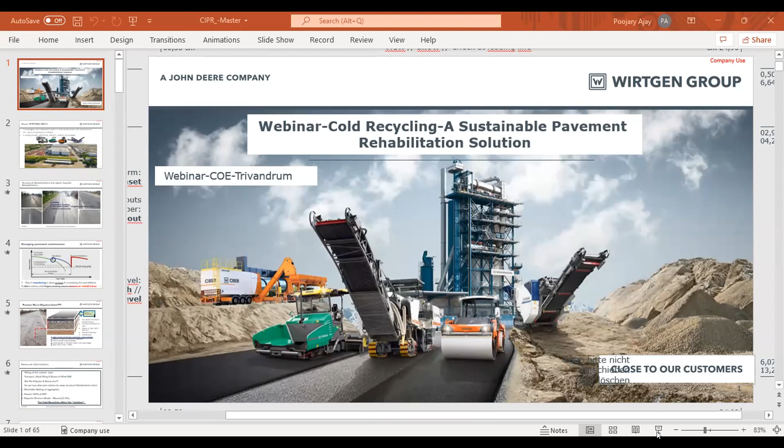Ajay, can you please switch on your video? It's off right now. Yeah. If possible. Is my presentation visible, ma'am? Yeah, presentation is visible. Yes. Yeah, so there's some issue with my video. Is it in full screen mode presentation? Yes. Yeah. Can I start? Yeah, sure. Video is off if you wish. No, actually I'm facing some difficulties. Okay, fine. Okay, we'll proceed. I'll check once again. No, ma'am. Okay, I'll start.

So once again, good evening, everyone. So today's topic is on recycled pavements using foam bitumen technologies.

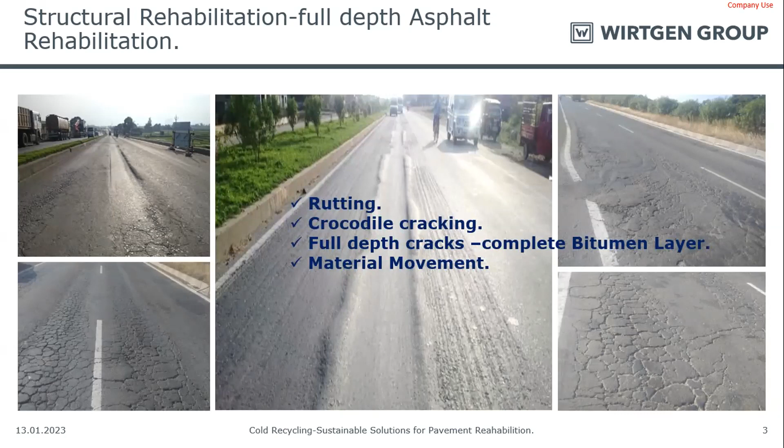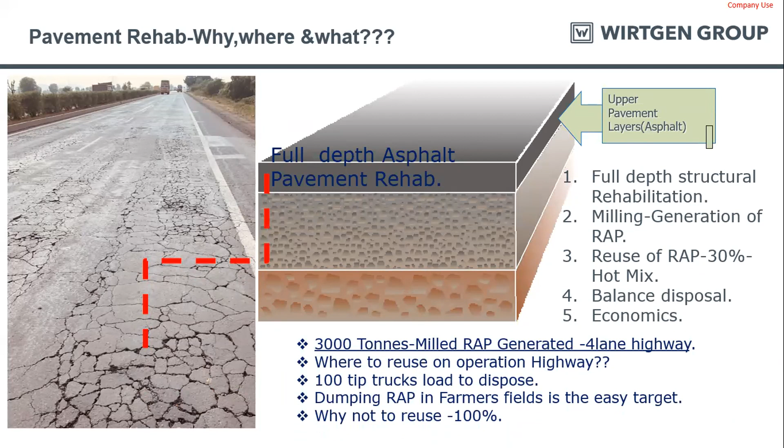So coming to pavement rehabilitation, depending on the pavement conditions, we go for full depth asphalt pavement rehabilitation for the upper layers of the asphalt layer. One option you have is mill the existing damaged asphalt layer using a milling machine, and then you can reuse 30% back into the hot mix. The code allows 30% reuse in the DBM layers, but the question arises what you will do with the remaining 70%. Whether you're gonna dump it or dispose it in the nearby areas, again it causes environmental problems. So the question arises, why can't we use 100% of RAP back into the system?

Coming to resource optimization, as I said, one option of pavement rehabilitation is mill and fill. Mill the existing asphalt layer, take it back to the hot mix plant, and use it 30% back into the system. But there is one more option where you can get 100% RAP back into the system. That is called CIPR, cold in place recycling. This ensures 100% reuse of RAP back into the system. We do it in situ. It eliminates any heating of the existing aggregates, and we require only 2.2% of bitumen as binder and 1% cement as filler.

So what is cold recycling? CIPR, as the name says, is a method of removing and reusing the existing asphalt surface. It involves grinding the existing top asphalt layer, mixing it with the pre-spread cement and bitumen as foam, and placing it back on the surface.

Here the existing pavement is not heated at all. Only the bitumen is heated, to a temperature of 170 to 180 degrees Celsius, depending on our job mix formula as well as the design criteria. Here foam bitumen or emulsion is used to bind the cold aggregates. In emulsion, as you know, water makes up to 30%, so 1.3 times the amount of emulsion is required to add the same amount of bitumen.

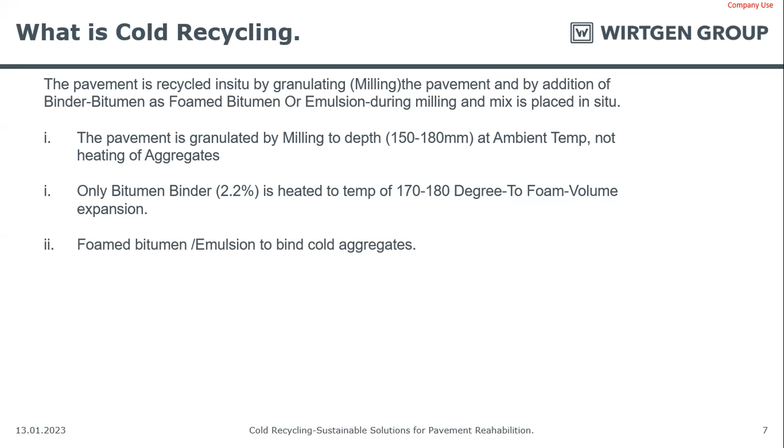If we go for emulsion, it just creates patches on the surface of the aggregates. Whereas in the case of foam bitumen, we add 2.2 to 2.4% of VG30 bitumen, so it covers the entire surface area of the aggregates. Hence we get more bond and better riding quality. The codes for recycling of pavements are IRC 37, 2012 and 2018, as well as IRC 120.

In in situ recycling, 100% RAP is used back into the system. We add 10 to 15% of fresh aggregate as per the missing gradation, and 1% cement as filler. When we check the modulus in the lab, we get close to 1400 MPa, but the code specifies a modulus of 800 MPa for recycled mixes.

CIPR is executed mostly in situ, so we can roughly do about 1 lane kilometer per day. Hence we get reduced logistics, resulting in economical and greener pavements. Next is a short video where you can observe the CIR process.

This is the foam bitumen concept. On the left hand side, you can see the nozzle for the hot bitumen. The bitumen is heated to a temperature of 170 to 180 degrees Celsius, and we generally use VG30 grade. This is the water line. When hot bitumen comes in contact with water as well as compressed air, it expands 18 to 20 times its original volume, which creates foaming of the bitumen.

This foam bitumen covers the entire surface area of the aggregate. All this process happens inside the mixing chamber of the machine. On the right hand side, you can see the mixing chamber, inside the machine. We have the water line as well as the bitumen line attached to the machine.

This drum granulates the existing asphalt layer and mixes it with the pre-spread cement along with the foam bitumen. So we get a BSM layer, called bitumen stabilized material. All this process happens inside the machine itself.

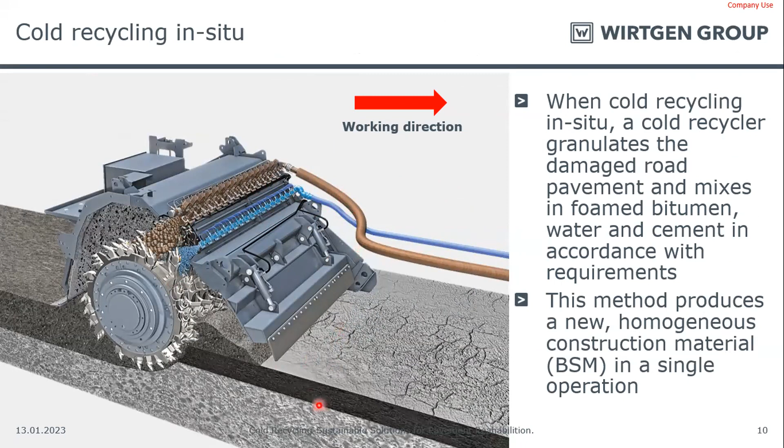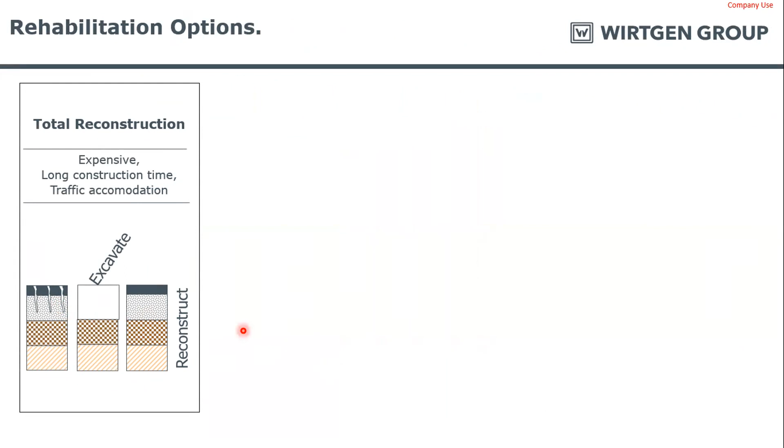Coming to rehabilitation options, we have different kinds of solutions. On the left hand side, you can see the complete top asphalt layer is damaged. One option is total reconstruction, but as you know it's expensive, leads to long construction time, and traffic will be a huge issue. The second option is a thick overlay, but it's not a permanent solution, just a temporary relief layer. The cracks will propagate into the top layer in due time.

The third option is mill and fill. We eliminate the existing cracks by milling with a milling machine, and then we can reuse the RAP back into the DBM layer. Here the code allows 30% of RAP in DBM. The last option is CIPR. Depending upon the project economics and how much quantum of work you have, you can choose either mill and fill or CIPR. Here you can get 100% of the RAP back into the system, with faster construction of 1 lane kilometer per day. After the BSM layer, we lay a BC layer on top of it.

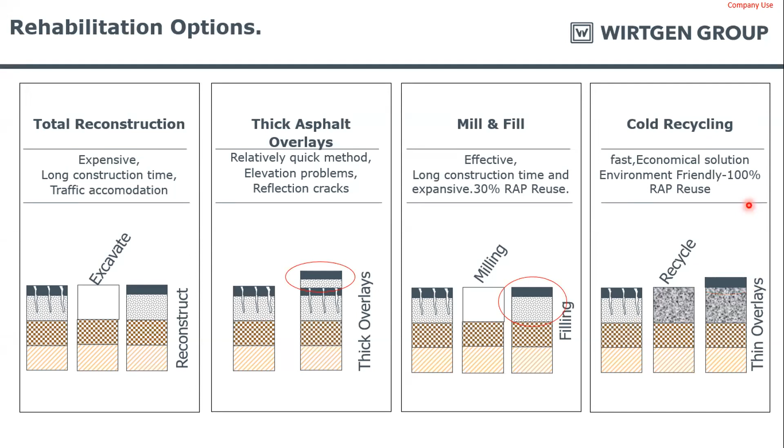This is the first recycling project done in India, on NH5, Chennai-Tada, connecting Chennai to Nellore. The project was executed under the guidance of Professor A. Veera Raghavan from IIT Madras, and the project was executed by L&T.

Here we recycled the asphalt layer up to a depth of 190 to 200 mm in situ. We required 2.2% bitumen as binder, and we added 15% crusher dust and 1% cement as filler. The final layer was laid with a 50 mm BC layer, and this was designed for traffic of 87 MSA.

As I said, you have two options, and you can decide based on project economics. Option one is mill and fill: mill the existing damaged asphalt layer and use 30% back in DBM. The second is the BSM layer, where you completely reuse the damaged asphalt layer back into the system, and seal it with a 50 mm BC layer.

Each of these two options, mill and fill or CIPR, have the same structural capacity. So the first option is mill and fill, and the second option is CIPR.

This was a mix design that we did at IIT Madras under the guidance of Professor A. Veera Raghavan. Here the samples were collected, we checked the gradation, and we put it inside a pavement.

The minimum criteria as per the codes is we need to get a half-life greater than 6 seconds and an expansion ratio greater than 8 times. This should be satisfied as per the TG2 guidelines 2009.

Then we cast molds and check for ITS, indirect tensile strength. This is done to check the susceptibility of the binder coating to moisture damage. As per IRC 37, the minimum criteria for ITS values are: we should get an ITS dry value of 225 kilopascal and ITS wet of 100 kilopascal.

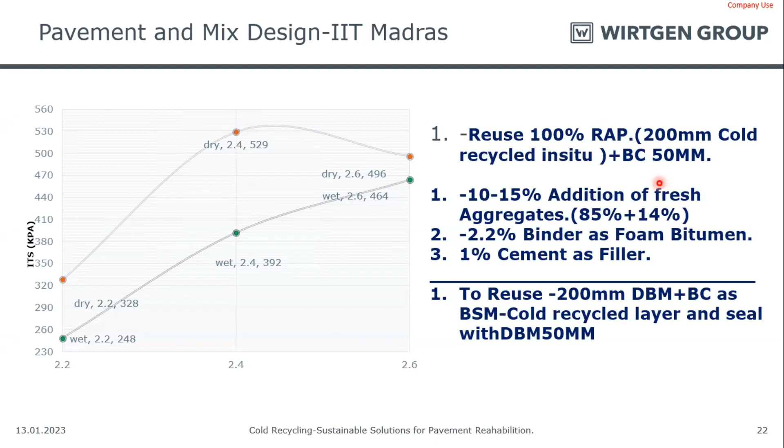It's a microprocessor controlled system where, depending upon the depth as well as density, this spreads the cement. It is an automatic controlled machine.

Next is the Wirtgen recycler. It granulates the existing asphalt layer along with the addition of bitumen and water. The bitumen and water tanker will be coupled in front of the machine, which pushes the water and bitumen tanker. The bitumen will be preheated and stored in the truck at a temperature of 160 to 180 degrees Celsius as per the design.

After this process, we use the roller, a 20-ton roller to get better compaction results. Then we grade it to get the profile, and then we have the single drum roller and the pneumatic tire roller to follow. So this is the procedure of how we execute it in situ.

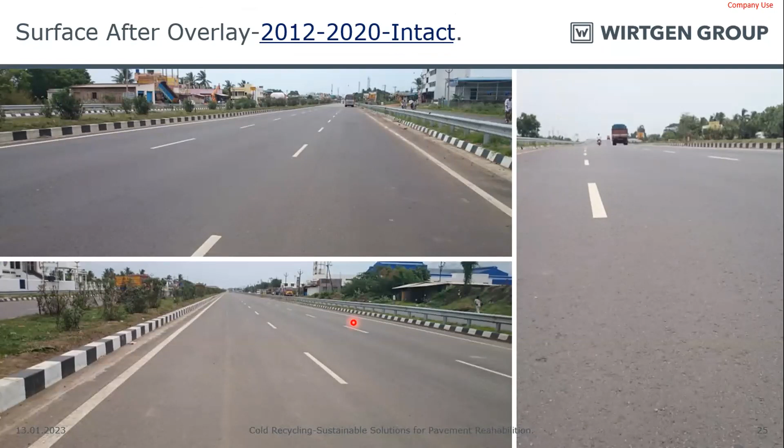Coming to cost economics, as I said, depending on project conditions, we can choose either mill and fill or CIPR. By using the mill and replace option, we could get a rough cost of 314 lakhs per kilometer. But if you go with the CIR process, we got a cost analysis of 204 lakhs per kilometer. So there was a huge amount of initial cost savings, roughly 35% cost savings by using CIPR technology.

Coming to fresh aggregate requirement, if we had gone with mill and fill, we would have required roughly 8,000 tons per kilometer of aggregates, but by CIPR we required roughly 3,000 tons per kilometer. So roughly 65% savings in terms of fresh aggregate requirement. In terms of fresh bitumen requirement, we could save roughly 25% in this project.

So this was the existing condition of the road. Again, you have two options, either to go for mill and fill or BSM. Here we recycled the top 150 mm damaged asphalt layer and we sealed it off with a 50 mm BC layer on top.

This project involved addition of 15% fresh aggregates into the system, and we had cement at 1% as filler, and bitumen requirement was 2.2%. So the complete damaged layer was recycled in situ, and then we sealed it with a BC layer on top. As I said, it's a quick process.

We could complete 1 lane kilometer per day. Coming to construction costs, roughly it will be, including the machinery, around 5,000 rupees per cubic meter.

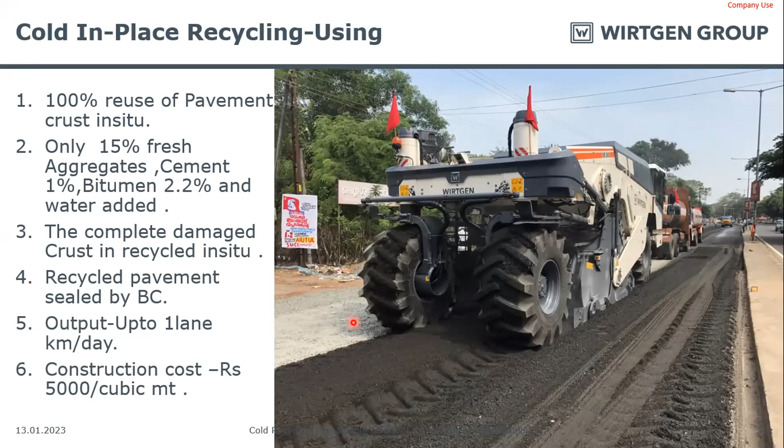Some pictures of site execution. You can see on the right hand side we have the traffic going, left hand side we are executing the project. This is the pre-spread of aggregates.

Second, you can see we are spreading the cement as per the design. Then this machine comes, which we used to recycle the existing pavement with the addition of cement as well as bitumen. Short video.

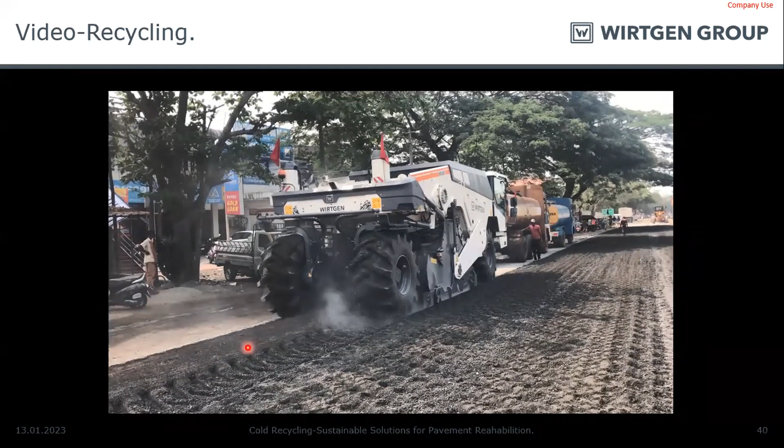So this machine will be in the coming project in Trivandrum, running for one more technology called FDR, full depth reclamation. We'll be starting this next week. So if you have to visit any job site, I think you can plan for this stretch.

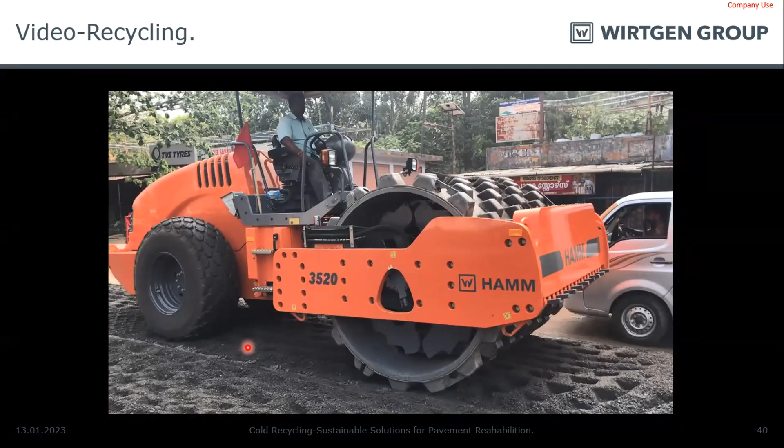This is a recycled surface after this CIR process. As I said, we pre-spread the cement, then we recycle it with the machine, and then heavy duty compaction, and then we grade it to the profile, followed by the compaction process.

In this project, we could come down on 26% savings in terms of aggregates and also in terms of cost. This is one more project, NH62, Beawar Pali Pindwara. This was executed by L&T.

This is some of the field investigations which were done. We dug up test pit observations. A total of 6 pits were dug, measuring 1.2 meters in size, dug up to the subgrade level at 6 different locations of this job site.

Next, coring of bituminous mix was done to evaluate the depth of the crack up to which this asphalt layer is damaged. Then we collected this milled material for evaluation of RAP mix design in the laboratory. Various laboratory tests were done, and then the project was executed.

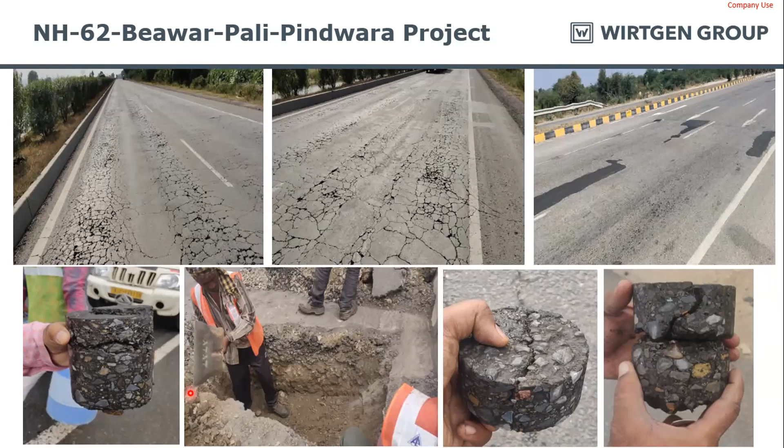There are two options. Here we recycled 130 mm in situ with the addition of 10% fresh aggregates, and we then sealed it with 50 mm BC.

These are some of the IITPAVE values for fatigue and strain criteria. These are the job site pictures. Here you can see the bitumen tanker and a water tanker, which is coupled to the machine.

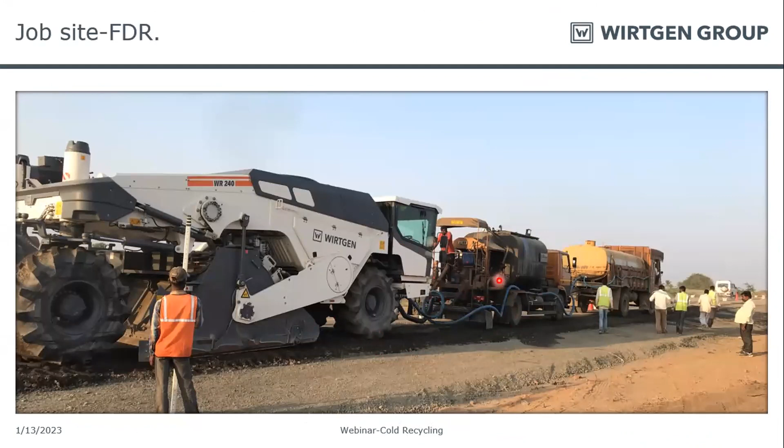These are the execution process. As you can observe from the pictures, first we pre-spread the aggregates as per the mix gradation. Then we spread the cement using the microprocessor controlled cement spreader. Then we pulverize the existing damaged asphalt layer with the addition of bitumen as foam and water as per the mix design. Then we grade it and compact as per the design, and on top we cover it with the asphalt layer.

These are some job site procedures. The existing asphalt layer, we spread aggregates as per the mix gradation, and we grade it with a grader.

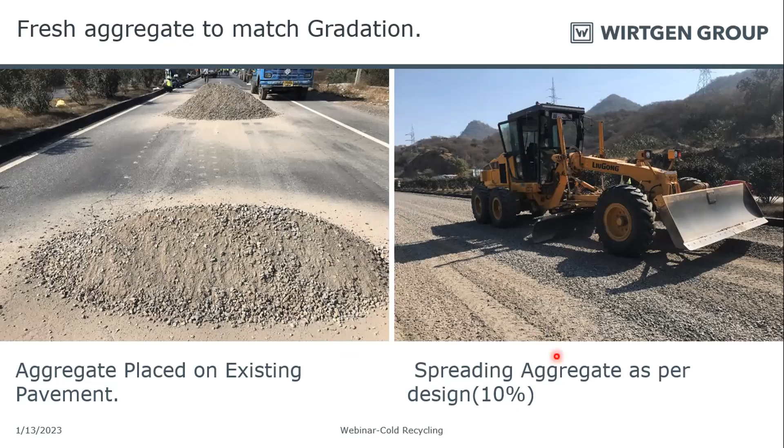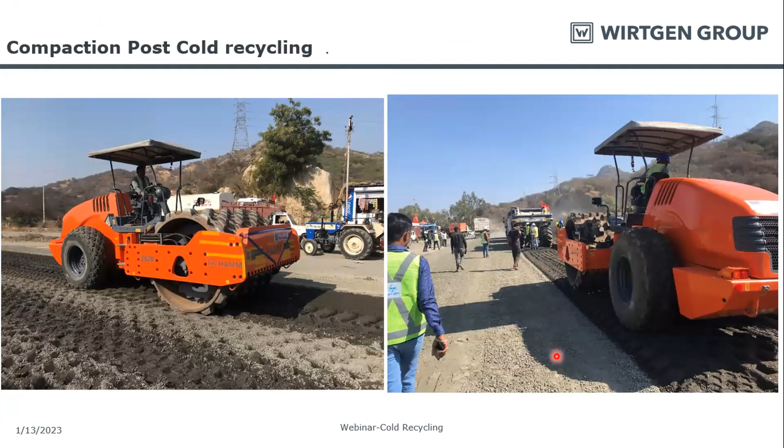The next step is we do a heavy duty compaction, then grading to the profile, and we get a recycled surface. Then we lay a tack coat and a BC on top of the BSM. We need to cure the BSM layer for 48 to 72 hours before laying the BC layer.

These are some of the job site pictures. There's one more site in NH2 Varanasi. Here we recycled roughly around 130 mm of the existing asphalt layer.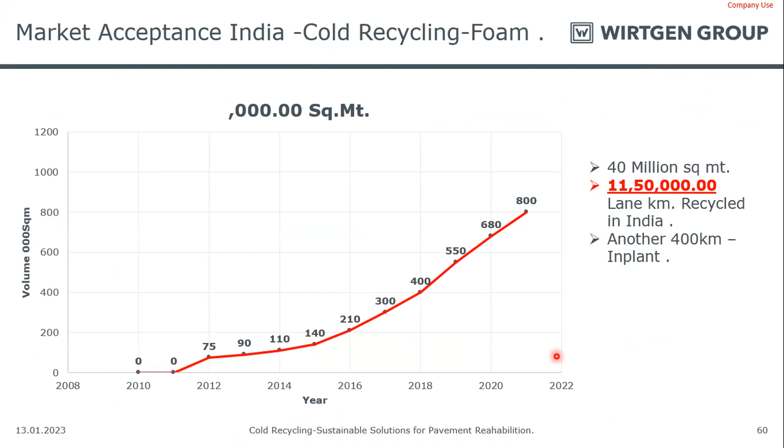Coming to market acceptance in India, we have roughly done around 40 million square meters using these technologies, and another 400 kilometers we have executed in the plant way. These are the summaries from the various projects, where we could save on aggregates, save on bitumen, as well as emissions.

So we check the bitumen temperature, and also we check the expansion ratio and half-life. We check the bitumen which is being injected to the machine, and also we check the density in the field. After the existing layer is relaid, we take samples for evaluation in the lab.

Coming to the cold recycling summary, as I said, it depends on project to project. The average working depth in India is roughly 100 to 180 mm. We recycle DBM and BC together, so 100% of your RAP is reused in the system in-situ. We only require an addition of 2.2% bitumen as binder, VG30, and 10 to 15% fresh aggregate as per the design. There is no heating of fresh aggregates.

The approximate cost for this, including the machinery, is 5,000 rupees per cubic meter. It's faster construction, you get savings in emission, and roughly you can complete 1 lane kilometer per day.

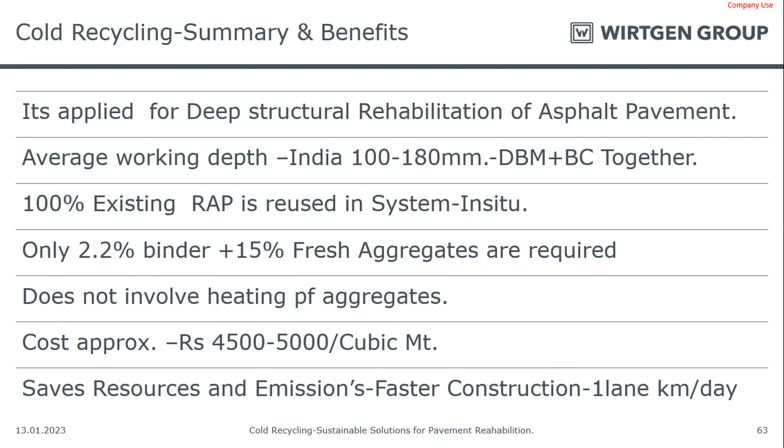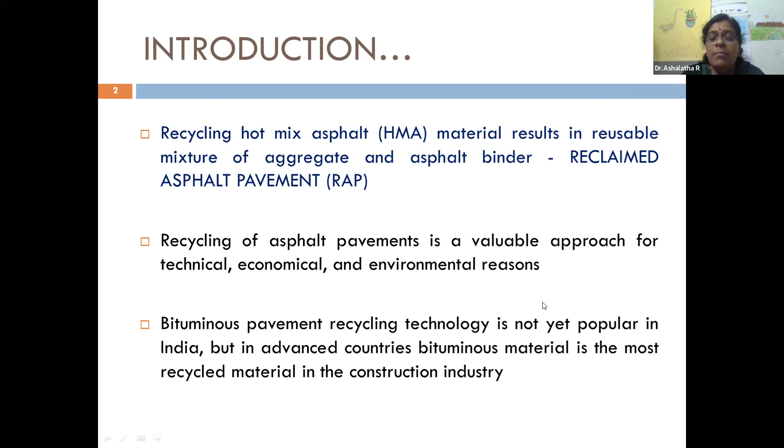And of course, it is getting more prominence with the contribution of the experts in this field and with the industry. It has become more important, but in outside countries it has already been extensively used. And we know of the various ecological and economic advantages which contribute to the enhancement of the recycling process: to conserve the aggregates and binder, to reduce the cost of transportation, to preserve the existing pavement geometries, conservation of energy and labor, and decrease in the pavement thickness or height.

Okay, so we know that RAP is actually deteriorated bituminous mix, which contains aged bitumen and aggregate, and its performance as such is poorer when compared to that of the fresh mix. But we have to use it. How to make it better or almost equal to a fresh mix and use it? So bituminous recycling is to regain the properties of the RAP such that it tends to perform as good as fresh mix.

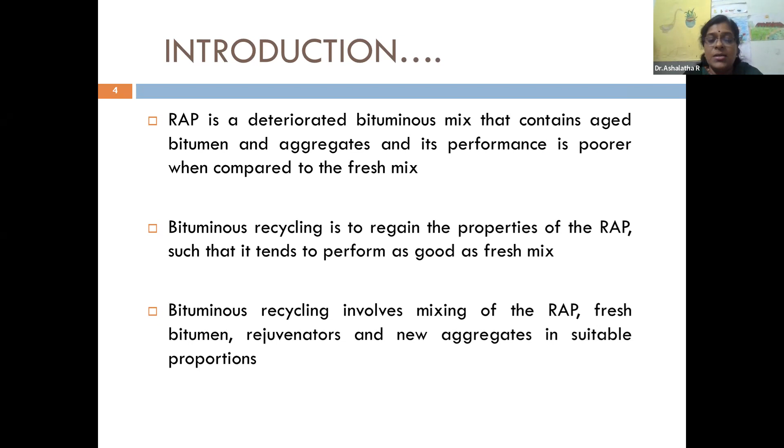Okay, so it involves mixing of the RAP, fresh bitumen, rejuvenators, and new aggregates in suitable proportion. So what is that proportion? That is what we were exploring in our first work. And later on, we tried to use warm mix asphalt additives, because it is known that warm mix asphalt additives reduce the temperature of production of mix and stiffness of the aged binder. And warm mix asphalt technologies in practice, like WMA foam, Asphamin, Sasobit, Evotherm.

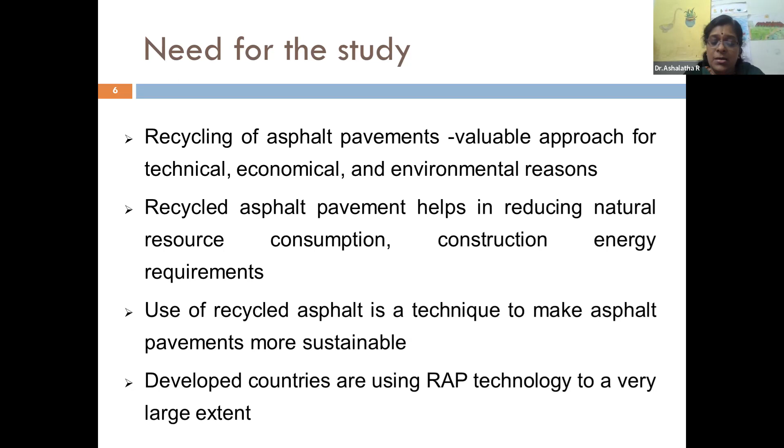Okay, coming to the need for the study at that time, as I said earlier, way back in 2013, we understood the importance of the country switching over to recycled asphalt pavement, and it is something which will happen in the near future. And this use of recycled asphalt is a technique which, as I said, comes under sustainable engineering, and developed countries have already moved well ahead in this particular area, and we are only in the initial stage.

Of course, now we have improved a lot, and the RAP consists of this aged binder with high viscosity. When we add the WMA additives like Sasobit, we use Sasobit, it generally reduces the viscosity of the asphalt binder.

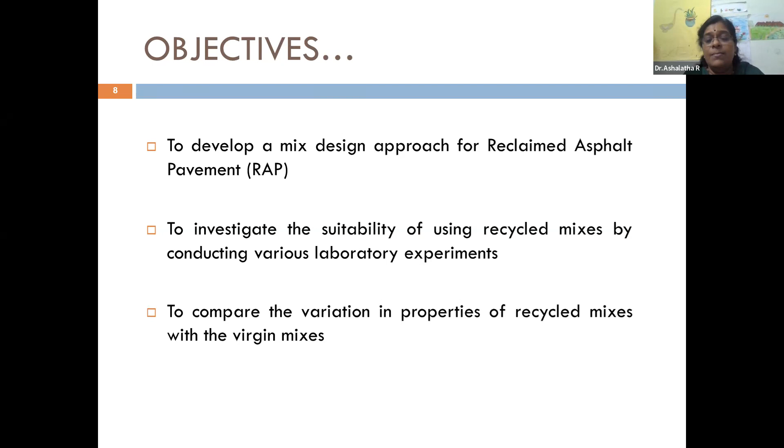And coming to the objectives: to develop a mix design procedure for reclaimed asphalt pavement, to investigate the suitability of using reclaimed asphalt mixes by conducting various laboratory experiments, to compare the properties of the recycled mixes with the virgin mixes, to develop a methodology for design of bituminous concrete mix using RAP with Sasobit as additive, to conduct various performance tests to evaluate the permanent deformation, moisture susceptibility, and stiffness of the bituminous concrete mix with RAP and Sasobit, and to compare the performance of bituminous concrete mix with RAP and RAP with Sasobit with the original bituminous concrete mix.

And this was the methodology. So I already said it has two parts. In the first set, we were developing what procedure is to be adopted. So for that, we collected RAP from two locations in Trivandrum city, and we characterized the RAP: binder content determination using a centrifugal bitumen extractor, extraction of the aged bitumen using a rotary evaporator, and sieve analysis of the extracted aggregate. And also we determined the properties of the aged bitumen, aged aggregates, and the fresh aggregates, because we need some fresh aggregates too, as well as the virgin bitumen.

So all those properties were tested, and the Marshall mix design approach to prepare control specimens was adopted, with bituminous concrete mix with nominal aggregate size of 19 mm, that's grade 1, and average pavement thickness of 50 mm. And we determined the binder content. Based on that, we first found out the optimum bitumen content, we prepared the specimens, and then we conducted the various tests on them.

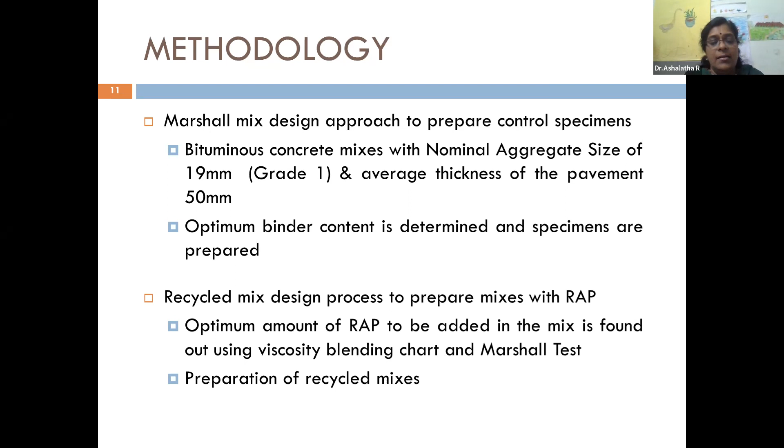And the recycled mix design process to prepare the mix with RAP. In that case, we found out what is the optimum amount of RAP we have to add in the mix. This was found, as per the literature at that time, using the viscosity blending chart, and the recycled mixes were prepared. And we also determined and compared the performance of these mixes. We conducted creep tests, dynamic modulus tests, indirect tensile stiffness modulus tests, indirect tensile strength tests, etc.

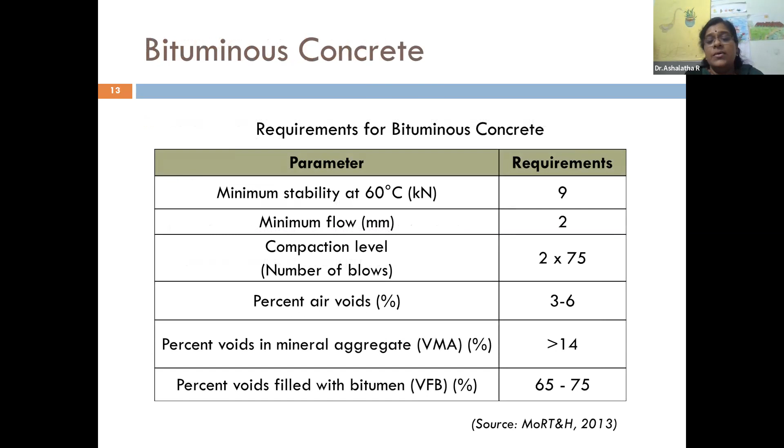And of course, since it's an old work, these are the specifications at that time, and the standard gradation for bituminous mix. And we used VG10 and VG30. Actually, VG10 was used as a recycling agent, and coarse aggregate, fine aggregate, and mineral filler. And as I said, RAP was collected from two locations. One was 3 years old, and the other 5 years. The RAP collected from sample one was a bituminous concrete mix, and the other was a premix carpet type.

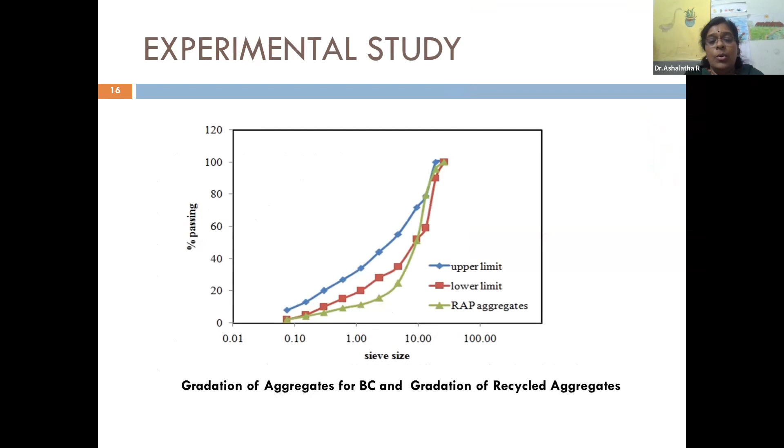And this is the gradation of the aggregate for bituminous concrete and gradation of the recycled aggregate, the upper limit, lower limit, and what we got for the RAP aggregate. Okay. We used the rotary evaporator because we needed to understand the characteristics of the bitumen. So we wanted to extract the bitumen from the RAP, and the bitumen was recovered from the solvent using this rotary evaporator. That ensures that there's minimum change in the bitumen property. And the bitumen recovered by this practice can be tested using the same method as the original bitumen, and the properties can be compared.

This slide is not moving. Okay.

Okay. So this is the rotary evaporator. I think already the photographs have been shown by the other speakers. And for this, my students and I went to IIT Madras and sought their help, because our institute was not having such a setup.

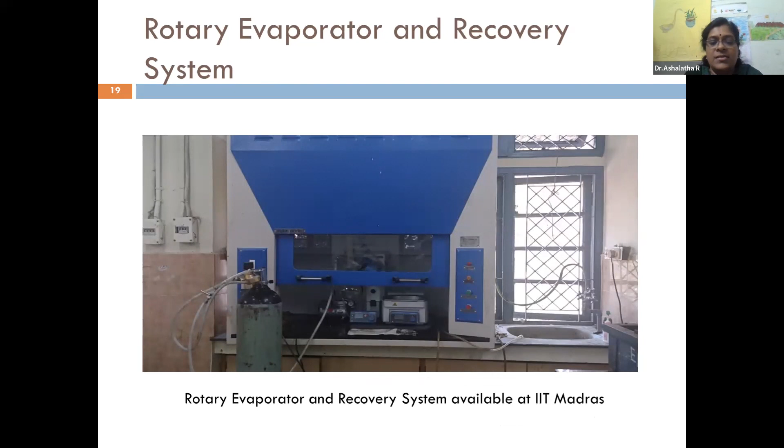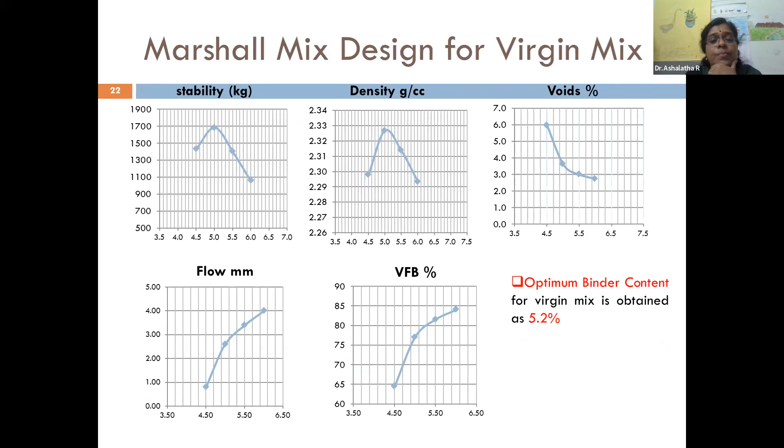And also we conducted the Marshall mix design for the virgin mix, and the optimum bitumen content for the virgin mix is obtained at 5.2%. And coming to the recycled mix design. So the basic requirement of the mix design is that the quantity of the old aggregate and new aggregate has to be adjusted in such a way that the resulting gradation of aggregates conforms to our specification, or the specified gradation.

And the quantity of the aged bitumen, the virgin bitumen, and the rejuvenator, in this case VG10 was used as a rejuvenator, we have to adjust in such a way that the resultant viscosity becomes equal to the desirable viscosity at the operating temperature. And the total quantity of the binder should be adjusted in such a way that it satisfies the desired binder quantity of the target mix. And then the other volumetric and strength parameters of the mix should also be satisfied.

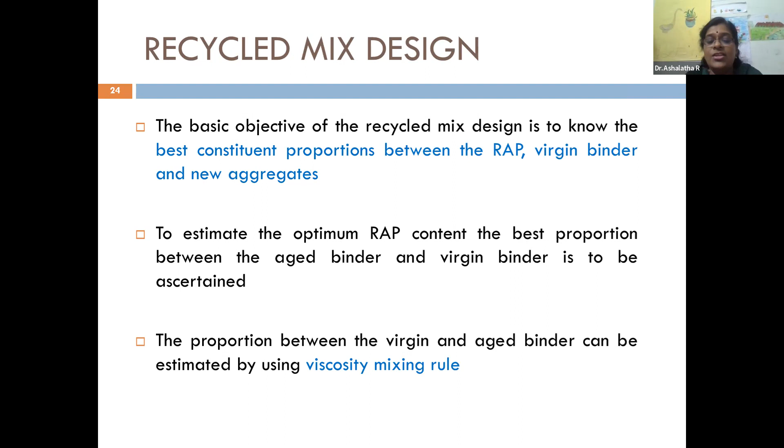So the basic objective is to know the best proportion of the RAP, the virgin binder, and the new aggregate, and to estimate the optimum RAP content. The best proportion between the aged and the virgin binder has to be ascertained first, and it can be estimated by using the viscosity mixing rule. And the percentage of the recycling agent that's required to meet a target viscosity is determined.

That is just to start with, and then we do a few trials. A trial blend, which consists of the recycling agent and the reclaimed RAP binder, is prepared, and the viscosity of this trial blend at 135 degrees centigrade is then compared with the target viscosity. If the blend viscosity is not within the limit, it's a trial and error process. We keep changing until we get the target viscosity.

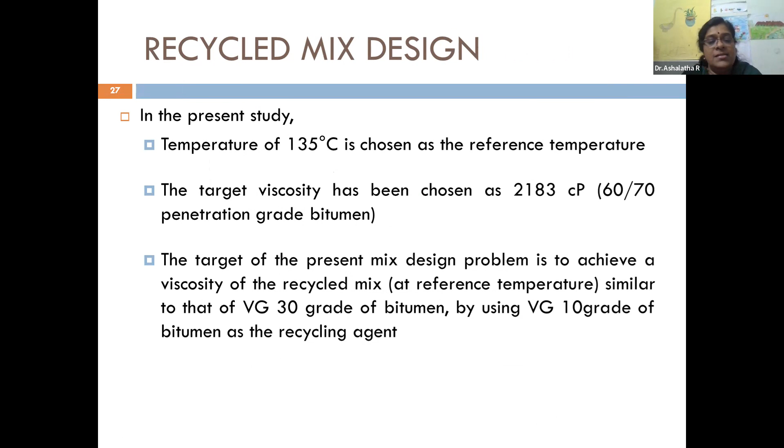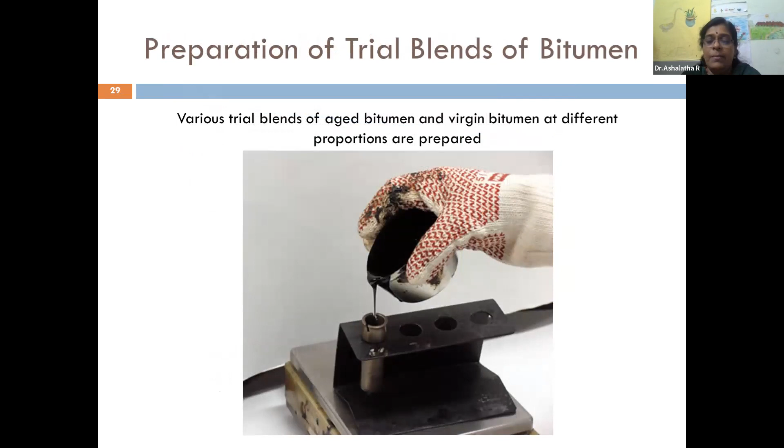The slide is not moving.

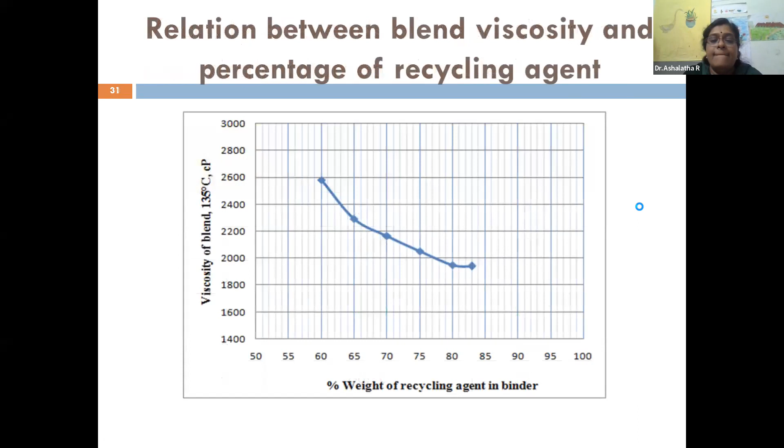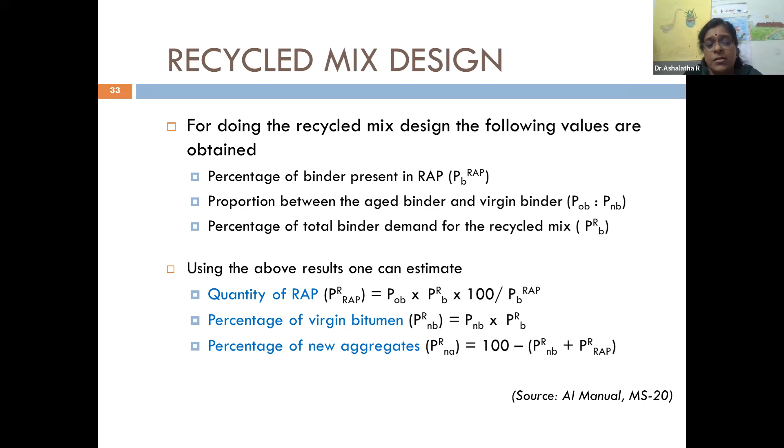So then, for doing the recycled mix design, we have to find out the percentage of the binder present in the RAP, the proportion we already obtained, and also the percent total binder demand for the recycled mix. So we use this expression, which is given in the Asphalt Institute Manual MS-20, to find out the quantity of the RAP, percentage of virgin binder, and the percentage of the new aggregate. And so those calculations were done.

And then Marshall parameters were determined for the recycled mix for different bitumen contents, and optimum bitumen content was obtained as 5% for the recycled mix, and the corresponding quantity of the RAP was 48%. You can see throughout our presentation, RAP content we are getting on the higher side, especially when you use Sasobit. And then the same thing was again repeated on the other sample. The same process was repeated.

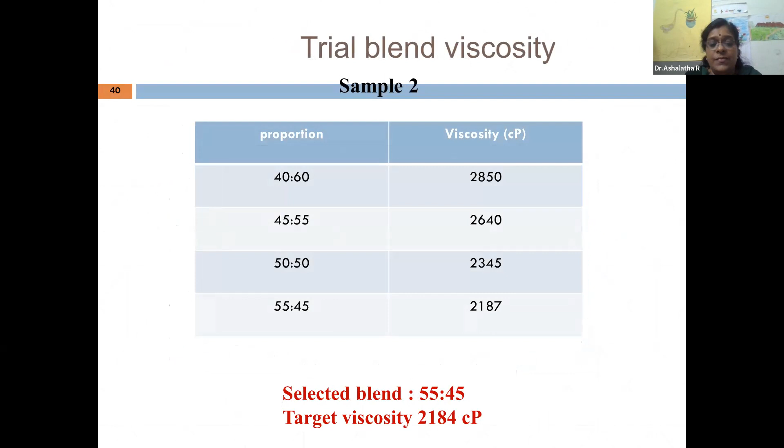So we found out the ratio of the recycling agent and the aged binder for the second case, and we found out which is the best proportion for this, which is nearer to the target viscosity. And then, for different binder contents and keeping that proportion constant, we found out the percentage of virgin bitumen, percentage of the RAP, and the percentage of the new aggregate in the recycled mix.

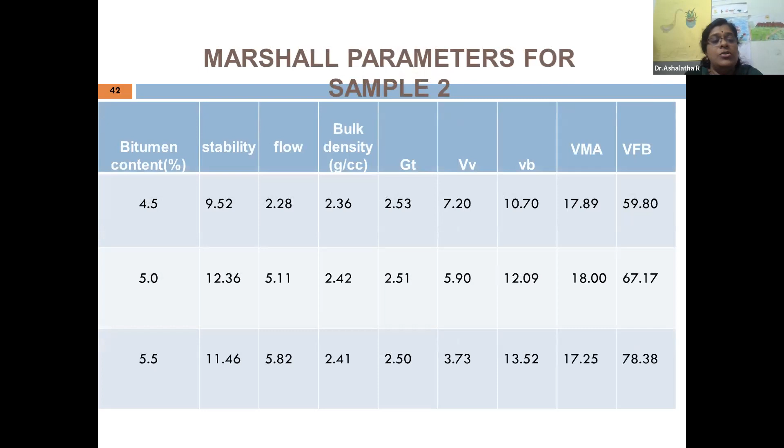And Marshall specimen parameters were determined for sample 2 for three bitumen contents, and optimum bitumen content was determined as 5.2%, and the percentage of RAP was 47.75%, and the percentage contribution of binder from the RAP was 45%.

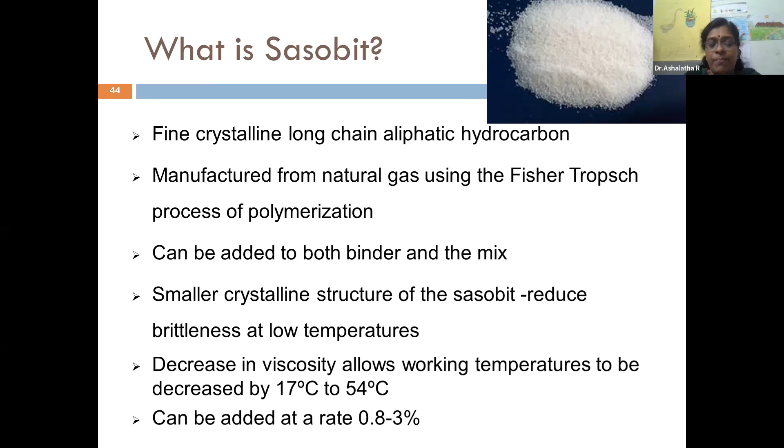And the advantages of using Sasobit are it improves the compactability of the mixture, and it decreases the rutting potential of asphalt mixes. That's what literature says. But it does not increase the moisture damage as other WMA technologies do.

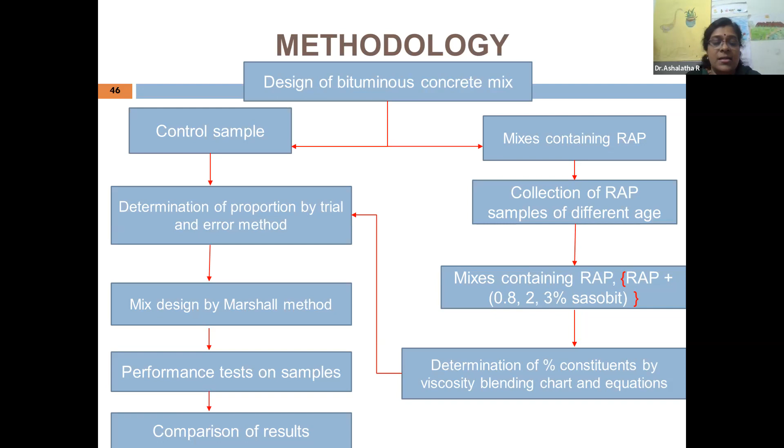So this was the methodology which we used, similar to the one we had discussed for the design of the RAP mix. But here, we have two samples, material collected from two locations. For each location, we conducted the test with 0.8, 2, and 3% Sasobit, and then we determined which is the best one, and then performance tests were conducted on that, and the results were compared, and also compared with the virgin mix.

Okay, so this is the design of the recycled asphalt mix containing Sasobit for sample 1. As I said earlier, aged bitumen with 0.8%, 2% and 3% Sasobit was done, and VG10 was used as a recycling agent. And these were the viscosities which we obtained. Similar to the earlier case, we found out the ratio of the recycling agent and aged binder, and that was done for sample 1 for 3% Sasobit, and this is the combination of those results.

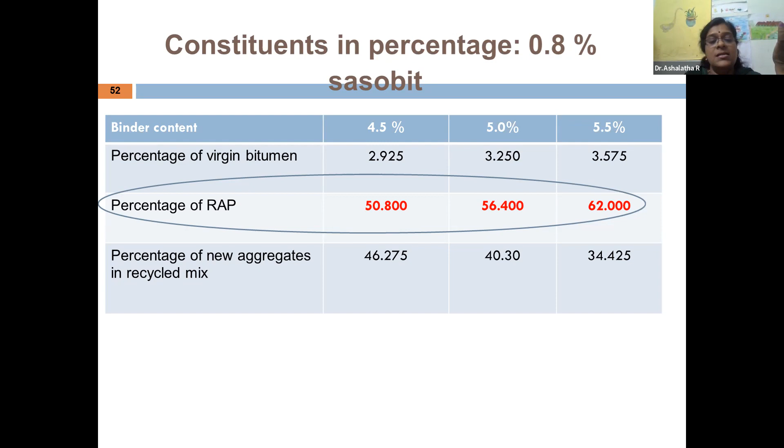And then what is the constituent in percentage? With 0.8% Sasobit, we varied the bitumen content for 4.5, 5, and 5.5, keeping the ratio constant. Based on those equations which I showed earlier, we could find out the percentage of the virgin bitumen, the percentage of the RAP, and the percentage of the new aggregates in the recycled mix. Okay, and the same exercise was repeated for 2% Sasobit.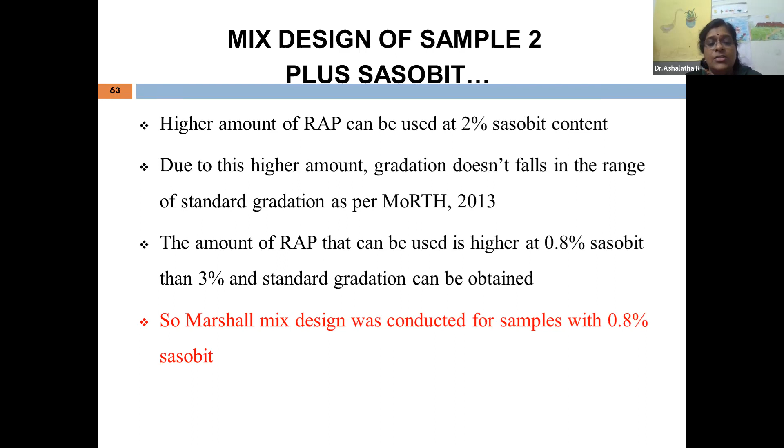And we could find that for sample 2, a higher amount of RAP can be used at 2% Sasobit content, but the gradation was not satisfying the MoRTH specification because it was falling out of the range. So then we compared between 0.8 and 3%, and we found that the amount of RAP that can be used is higher for 0.8% Sasobit. So we decided to go with 0.8% Sasobit for sample 2.

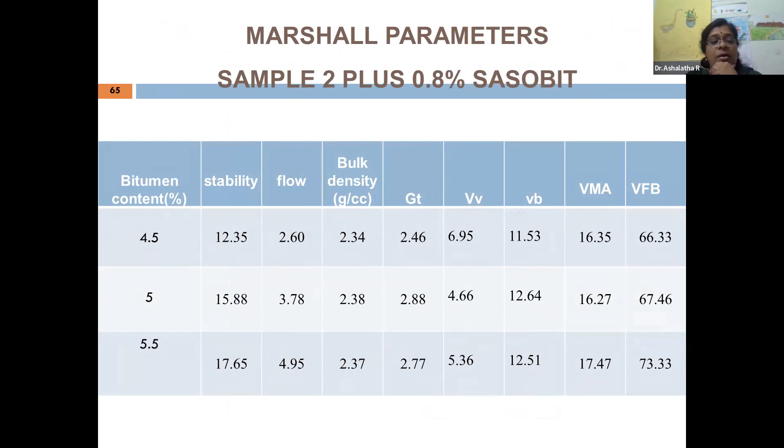So this is what I said, the trial and error process with 2%. Since it was not satisfying the required gradation, we went with 0.8% Sasobit, and these are the Marshall values. And then we found the optimum bitumen content comes to around 5.1%, percentage of the RAP as 65.57%, and the percentage contribution of binder from the RAP is 63%.

And these are for the optimum bitumen content with 0.8% Sasobit; as I said earlier, it was coming as 5.1%. And those parameters were compared with MoRTH, and we could see that here also not all are satisfied; the flow value is slightly outside the range, others are fine.

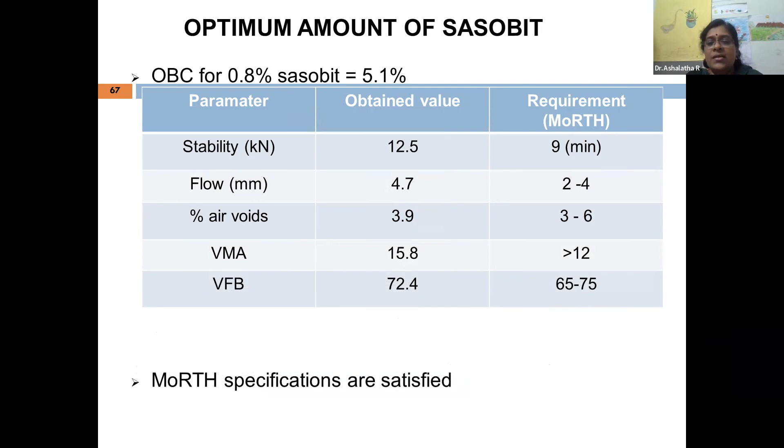And then, on the samples which we have finally, sample 1 with 2% Sasobit and sample 2 with 0.8% Sasobit, we conducted various performance tests: indirect tensile strength ratio test, static creep test, dynamic modulus test, indirect tensile stiffness modulus, rut depth determination, etc. In the first 2 cases, Marshall specimens were cast, and for the others, Superpave gyratory compacted samples were prepared. And this is the test setup which we used.

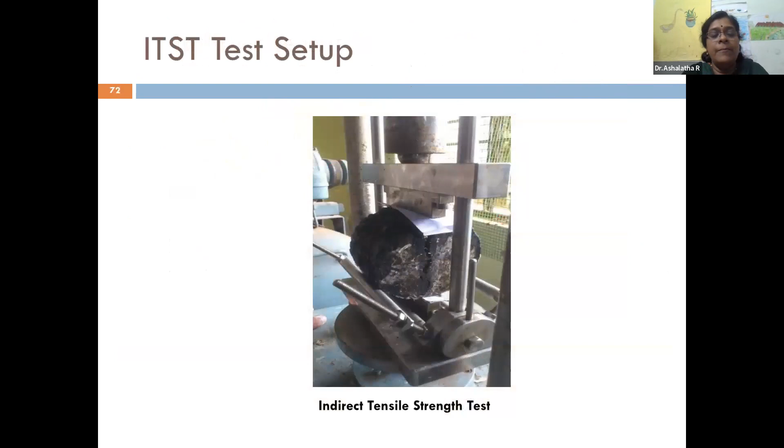I'm not going into those details. And this is the indirect tensile strength test, conditioning of the sample. This is what we did in our laboratory. So this is the indirect tensile strength test photograph. And this is the compilation of the results.

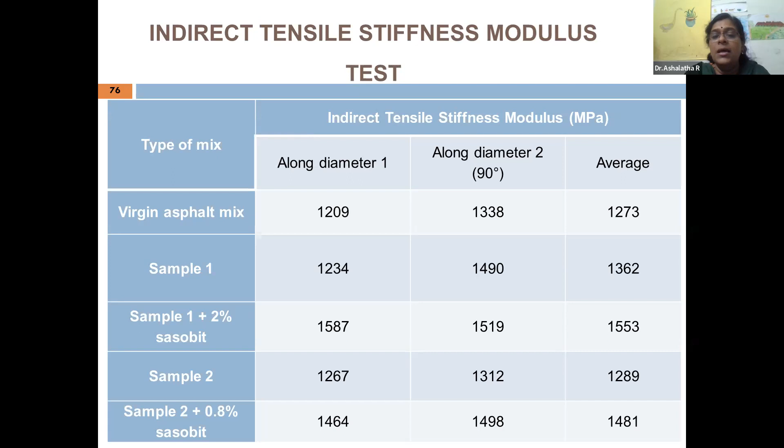And this is the indirect tensile stiffness modulus test. These are the values for virgin asphalt mix, sample 1, sample 1 with 2% Sasobit, and with 0.8% Sasobit. These were the average values which were reported. And we also conducted a wheel rut test, and these are the results. This is at 60 degrees centigrade.

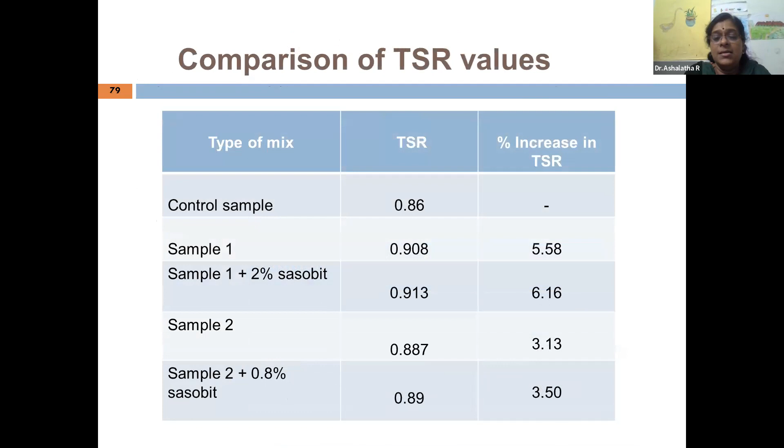As a conclusion, we could say that the mix design for recycled asphalt pavement mix and mixes containing Sasobit was performed through an integrated mix design procedure with the Marshall test, and the optimum amount of RAP and Sasobit content of each sample were found out. And these are the values which we obtained. Of course, I told you, since it's the initial work, we are getting it on a higher side.

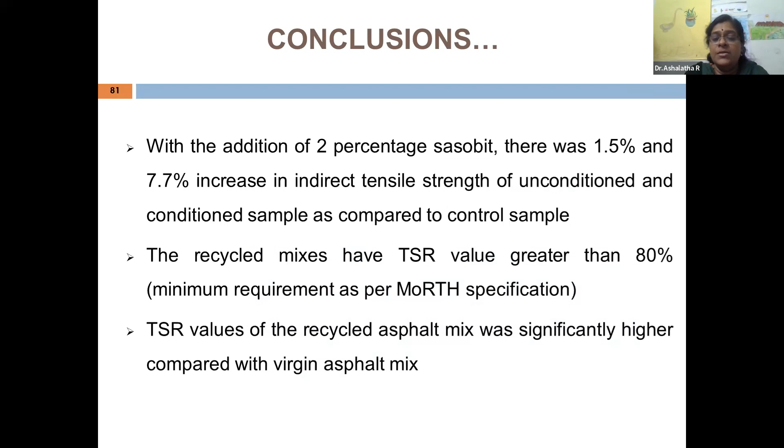And with addition of 2% Sasobit, we found that there's a 1.5% and 7.7% increase in indirect tensile strength of unconditioned and conditioned samples as compared to the control sample. And the recycled mixes have TSR values greater than 80%, the minimum as per the MoRTH specification. And the TSR values of recycled asphalt mix were significantly higher compared with virgin asphalt mix.

The dynamic modulus of the recycled asphalt mix was found to be higher than the virgin mix. And the indirect tensile stiffness modulus of the recycled asphalt mix was also higher than that of the virgin asphalt mix.

With the addition of Sasobit to RAP mixes, there was a 19% increase in the value. In the case of mixes containing Sasobit, the RAP amount in the mix was higher, so the stiffness modulus was also high as compared to mixes containing only RAP.

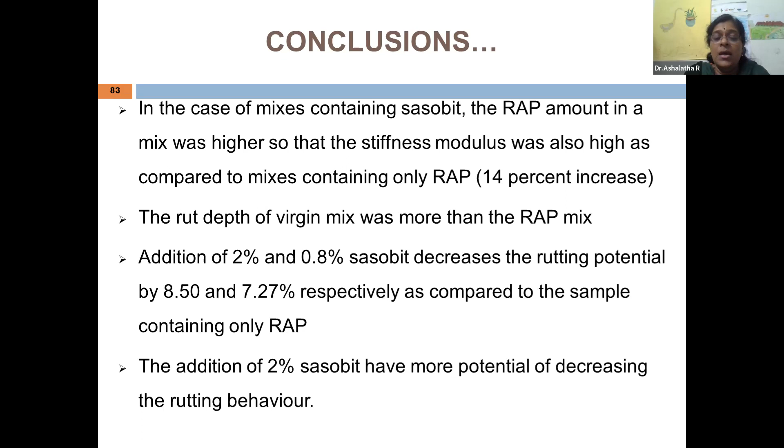Regarding rut depth, the virgin mix was found to have more rutting than the RAP mix. Addition of 2% and 0.8% Sasobit decreases the rutting potential by 8.5% and 7.27% respectively as compared to the sample containing only RAP.

So the addition of 2% Sasobit has more potential for decreasing the rutting behavior. With the addition of Sasobit, it is possible to design recycled asphalt mixes with a higher amount of RAP, up to 66%. Of course, that's on the higher side, so don't take it as the final word.

So whichever satisfies the most requirements, the addition of 2% Sasobit shows better performance test results as compared to the addition of 0.8% Sasobit, in terms of permanent deformation, stiffness, etc. So that is all from my side, and thank you for your patient listening. Thank you.